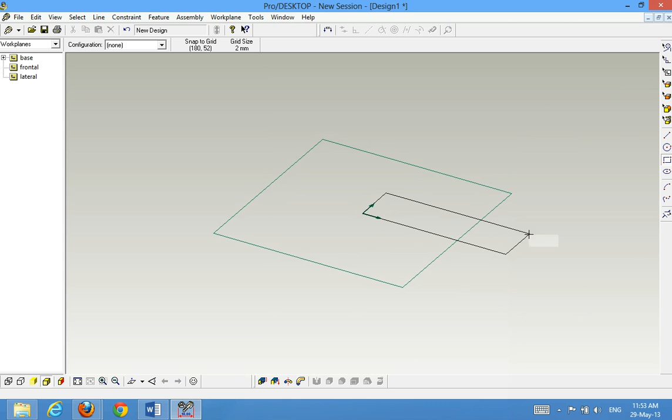I start by drawing a rectangle on the base work plane, starting in the origin of my drawing, and I'm going to assign some dimensions to that, like so.

Now I just click to select my dimension and double click, and I'll get a dialog box up. So I want it 200 millimeters long by, I think, about 42 millimeters wide.

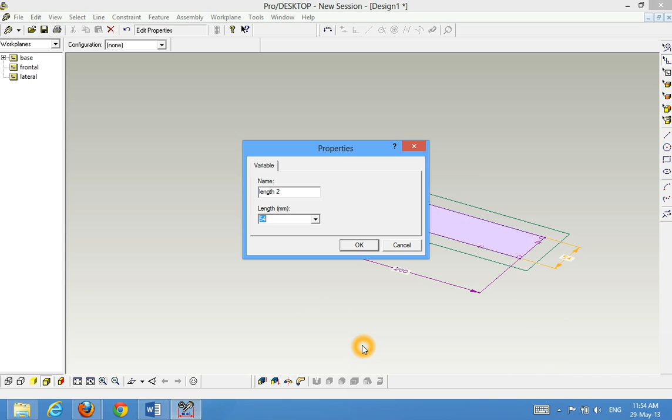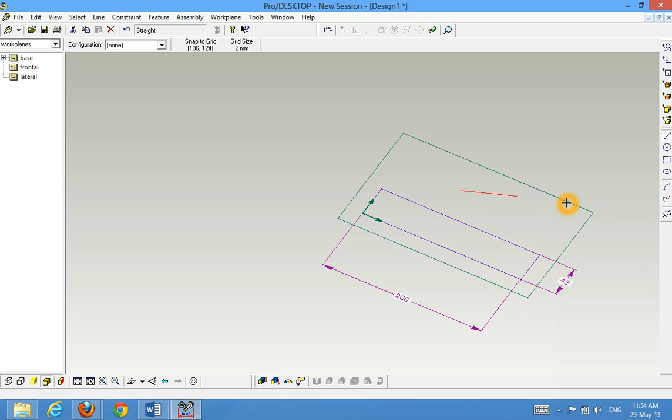Okay, so I now can extrude that to make it a solid block. Bear in mind at the moment that the color is shaded, so I have a valid profile. If I have a stray line somewhere, the profile's not valid, and I'll get an error as soon as I try to extrude. So if your shape is not shaded like so, you're going to run into problems.

So I'm going to feature, extrude profile, and I want a distance of 19 millimeters, and click OK. So there's the base of my birdhouse.

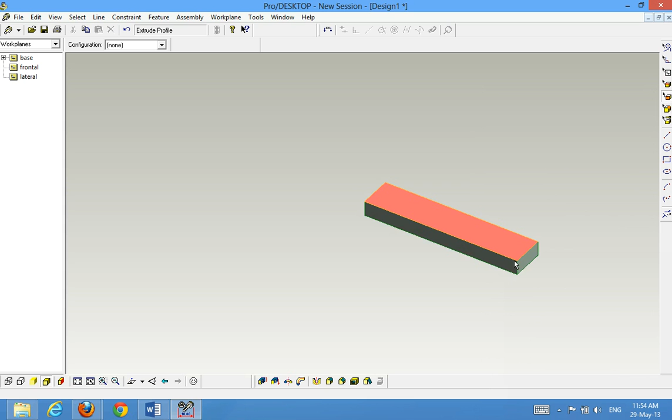Now I'm going to add a side, so I'm going to select the face where I want to put that side. When I select a face, I need to make sure the frame around the outside of my face is illuminated like so. Whoops, I missed it there, so I'll just try again. And there it is - that's the side where I want to create my first face.

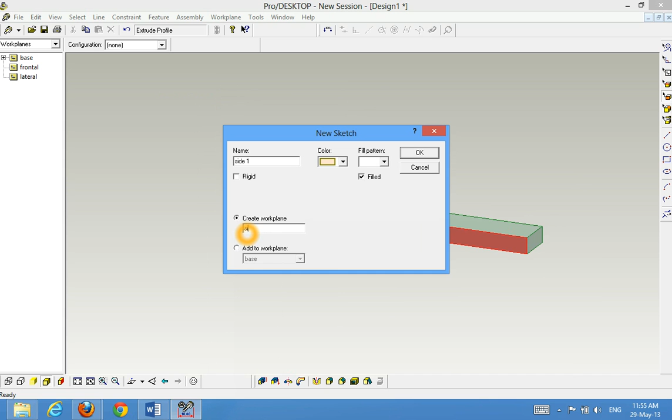I have my side selected, and now I need to go to work plane and new sketch. That's the step that people tend to forget, so remember: work plane, new sketch. Now I can call this side 1, and it's going to create a new work plane for me. I'm going to name that work plane side 1 as well, and click OK.

Now I can view onto the work plane and start to draw my side. I'm just tracing over what's there like so, so it's a nice neat fit. Once again, I can assign some dimensions.

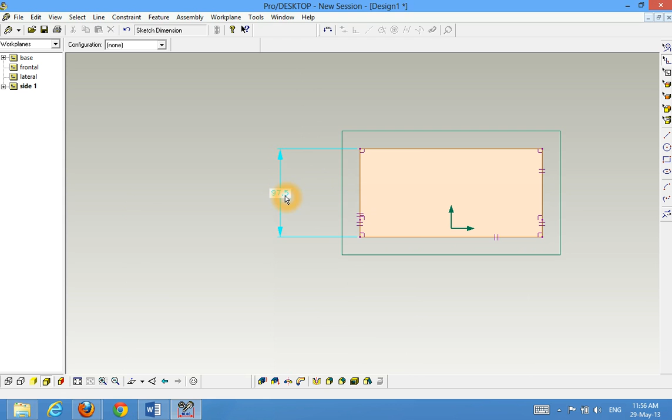So I'm going to deal with this dimension here, and I'm going to make that 100 millimeters, say.

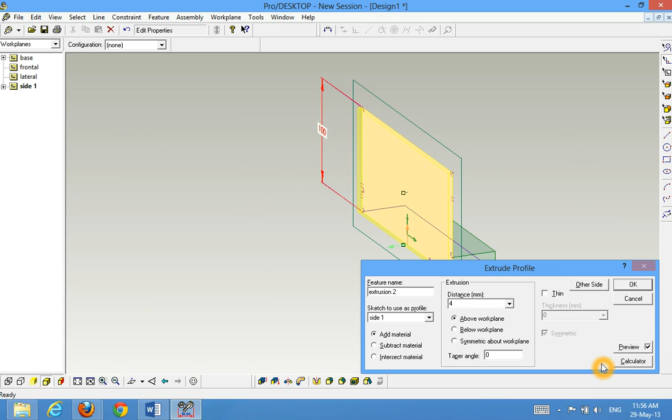Okay, now I've got a valid profile, so I need to extrude that profile at a distance of 4 millimeters. I need to be careful that I'm extruding outward, not inward, and I can adjust that by clicking on the little green arrow like so. So I'm extruding outward, and I click OK, and there's my first side complete.

Let's repeat the process and add another side. So select the face where I want to put the side, like so. Work plane, new sketch - this is the step that everyone forgets. I'll call this one side 2, and my work plane side 2 as well.

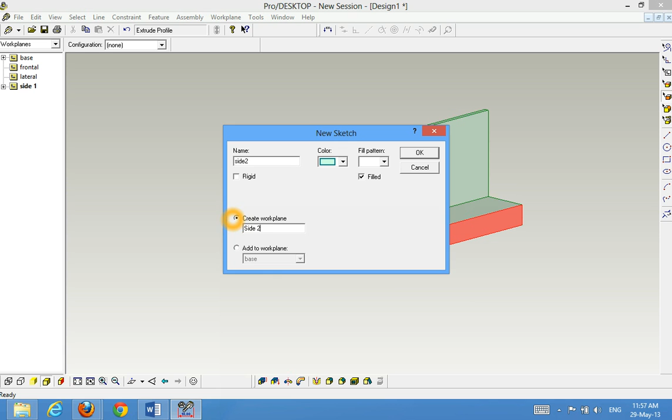Click OK. Viewing onto the work plane, grabbing my rectangle tool, creating the size that I want. I'm just going to assign that dimension so I make sure I'm absolutely accurate, constraining that to 100 millimeters.